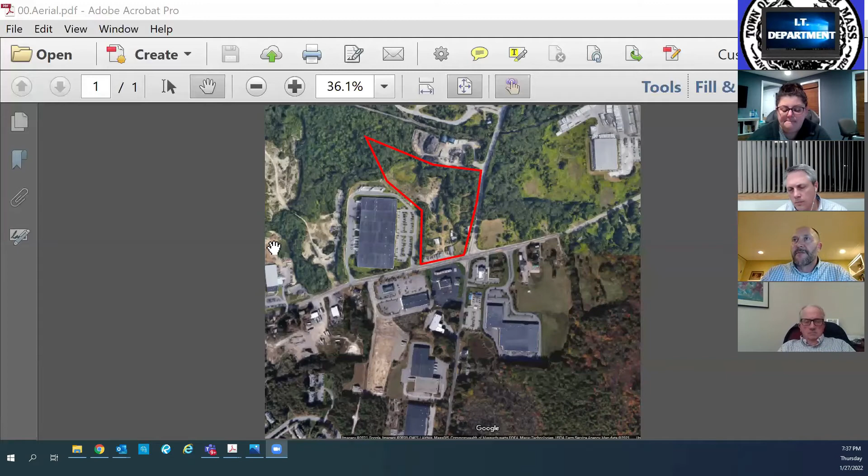And you can see the other uses nearby - we're abutting the Conroy warehouse there, an asphalt plant behind us, Gorelick Farms, and some other industrial uses. So with that, the proposed plan is a 124,000 square foot warehouse, as I mentioned. The project has been around for a little bit of time now, so we have worked very closely with the Zoning Board of Appeals, Mr. Kupfer, and staff as well, to really identify any goals and concerns and try to incorporate everything we've heard to date into the plan, which I think we have done, and I think it's a good project.

So we've got a Welcome to Bellingham sign right at the intersection. If you're stopped there, that is what you're looking at. Again, the landscaping behind it and in front of it, and you can kind of see the berm on the side of the building over here I was just referring to.

From an engineering standpoint, this site is about as straightforward as it gets compared to a lot of sites we see nowadays - we have nice sands on site, no ledge, and deep groundwater. Based on that, we're able to do two things: we were able to further drop the site, so it's actually about 6 feet lower than the intersection, further breaking up the view of the building, and we're able to balance the earthwork on site, so with cuts to fills everything balances and we don't have to bring in or ship off a lot of material.

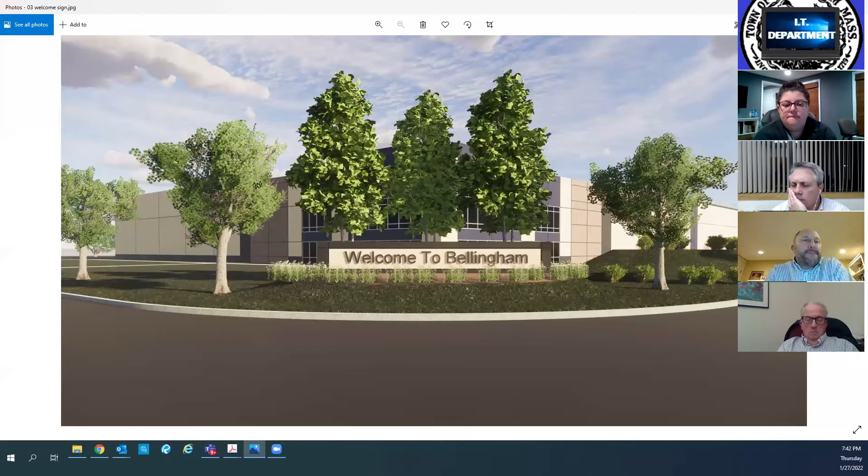From a drainage or utility standpoint, all utilities are present along the frontage and are available for reconnection, which is what's shown on the plans.

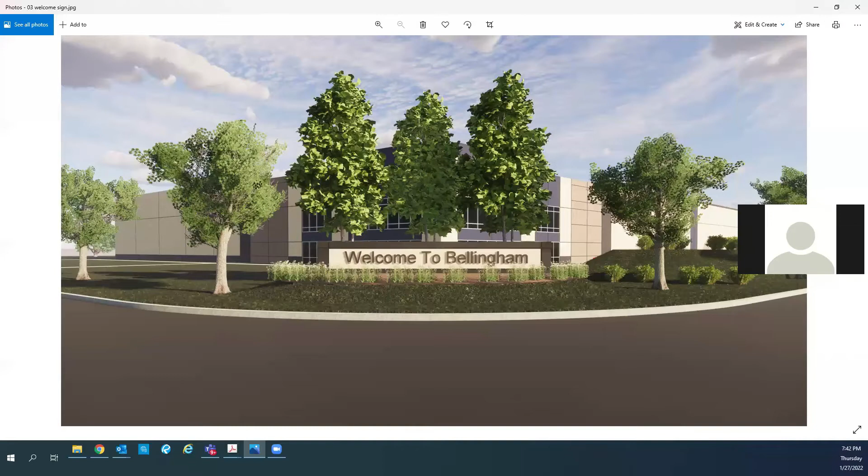We've made some significant improvements to drainage. When the abutting warehouse was constructed 15 or so years ago, a detention basin was built to serve this site - it was essentially oversized, intending the drainage from this site to go to it. Based on conversations with the Conservation Commission agent, we discussed providing treatment and infiltration on our site in accordance with today's standards, even though the site was designed to handle it. So we've done that - we've provided a stormwater system fully compliant with today's standards by way of recharge and treatment. Essentially every drop of water that hits this site will be treated and infiltrated into the ground, exceeding state and local standards.

As part of the application, we submitted information from our traffic consultant. As the board likes to see, this is a small warehouse, 124,000 square feet, so it's a low traffic generator. That said, we've also provided numbers as if it were a different type of warehouse, light industrial, and even a high sort facility, just so you could see those numbers. That's been provided to the board, and we expect your peer reviewer will review it.

What I will note, from a circulation standpoint, is that based on the location of the site, the majority of trucks exiting onto Maple Street are restricted from heading northbound on Maple Street. So we want them coming back towards Mechanic.

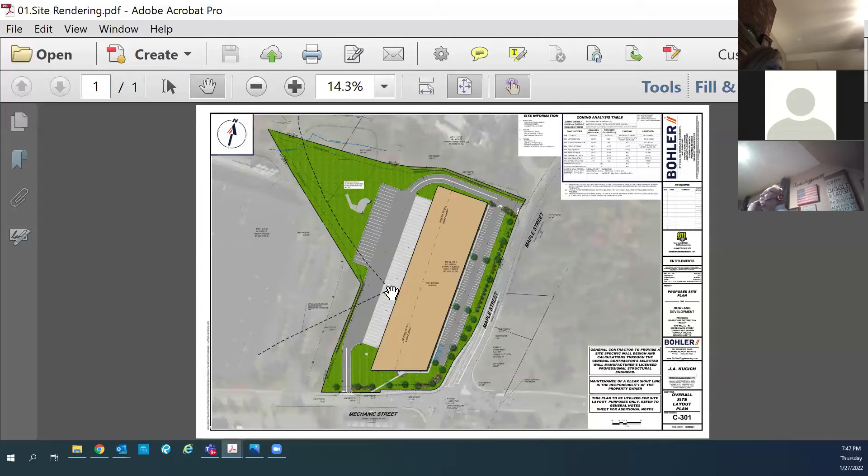The benefit of allowing that variance, which we have received—the variance has been issued and has become final—is that it enabled my client to develop this site with the truck loading in the back. If we had to keep the use in the industrial portion of the site, you could configure something, but it would not be a particularly attractive utilization of this property. And the feedback that we got from our preliminary discussions was that this design was much preferable.

What went along with that variance is, in the industrial zone, maximum height is 45 feet. In the business zone, it's 35 feet. So to have a building with a consistent height of 45 feet, we needed a variance for height. That went along with the use variance, and that was granted.

And then there were two other variances. One has to do with the driveway to Mechanic Street. Good engineering practice would locate it as far from the intersection with Maple Street as possible. But as we got closer to that edge of our property, you come to a second driveway on what was just referred to as the Conroy warehouse. The zoning bylaw wants at least 250 feet of separation between driveways. This is about 130, 135 feet. We needed a variance for that.

Our traffic consultant went through and is happy to review with you why, in these particular circumstances, the separation is not going to create any safety issues. And the way we will propose, for purposes of consideration, is some relining of Mechanic Street to allow for some center island opportunity and to direct the turning movements to make those driveways work very efficiently. So that variance was granted, and I believe there was a small variance about the parking layout.

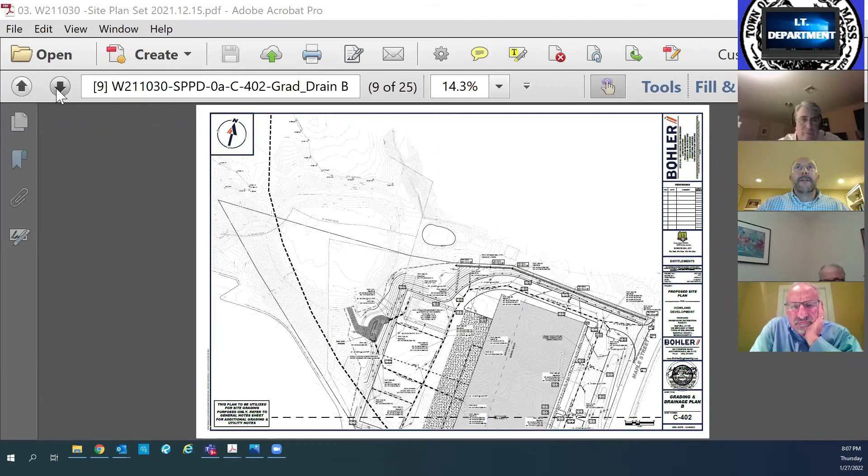Let's see, I'm going to share my screen again. Unfortunately the sheets are broken into two sheets, so you'll have to bear with me as I flip pages. You'll see on this is the back side here. You can see the berm coming up this way to our match line halfway through the building. And then when you flip the wrong way, apologies, you can see the berm continues up and starts to come back to grade right about here, give or take.

How high is that? It varies in height. At this point right here, it's a high point of about 8 feet, and then obviously it tapers down towards the edges. So right about there is about 8 feet.

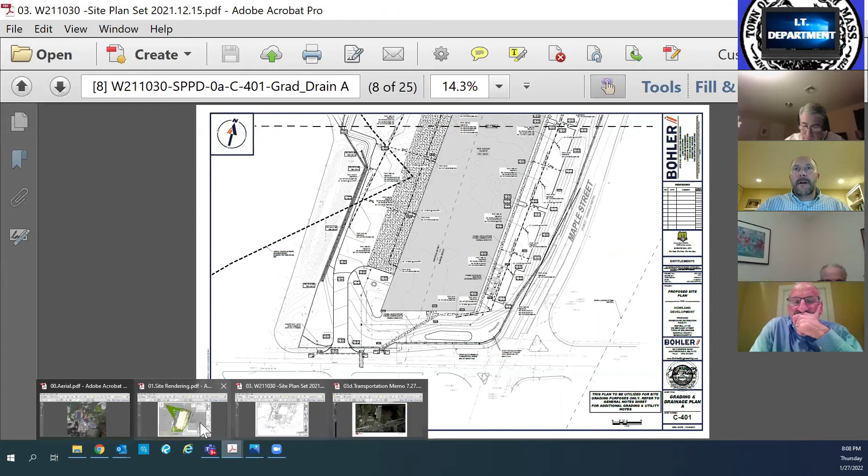Plantings on there? Absolutely, and you'll have future diagrams for that? We have current diagrams for that, but that was in the set that shows it. We can look at that later, sir. You got it. That's it from me.

Hey Bill, if any of the other board members don't have any comments or questions, I have a few. Certainly, I don't want to jump ahead of the line though. So go ahead. All right, perfect.

Rob, one thing I want to pick attention to, and you may pick up on this: it looks like they have storage for trucks back there. Two things for the applicant: they have all the trucks on site and not on Maple Street or Mechanic Street waiting to get in. And if you're storing trucks overnight, we need to address the concern of a spillage of any gasoline from those trucks. And with that, I'll turn it over to Rob.

Thanks, Bill. First off, thank you, John and Paul, for the presentation. That was really informative, so thank you very much. I guess I just want to echo some of the same comments made by Phil and Bill regarding the curb cuts. I agree that trucks going north on Maple Street, it's great if that can be restricted, because it's just not a good road for that kind of traffic.

I guess I just want to take a step back from traffic. I have a few more questions or comments. The next thing, regarding stormwater, I know you stated, John, that the existing basin you'll be utilizing after the underground infiltration system was designed for a development on this site. What exactly was the design? Did they spec out a specific size building, or how was that sized exactly?

That's a very good question. So long story short, to get into some of the history, the detention basin is that faint line right here. It's actually on this property and the abutting property. When this development came in, the plan was to develop a basin that handled flow from this site as well as that site. During the permitting process, to address your question, it essentially said you needed to plan for, I want to say it was 90% of the site needed to be impervious. So it was a very, very large number. We're well under the number it was designed for.

However, even on top of that, based on conversations with Ann, just how regulations change, they wanted us to treat and infiltrate the first flush on our site, which is what we've done. But if you actually head into the site and look back down the hill, it's a massive basin. It's huge. It looks very big from the aerial. So basically that recharge basin is for recharge volume and water quality volume, essentially.

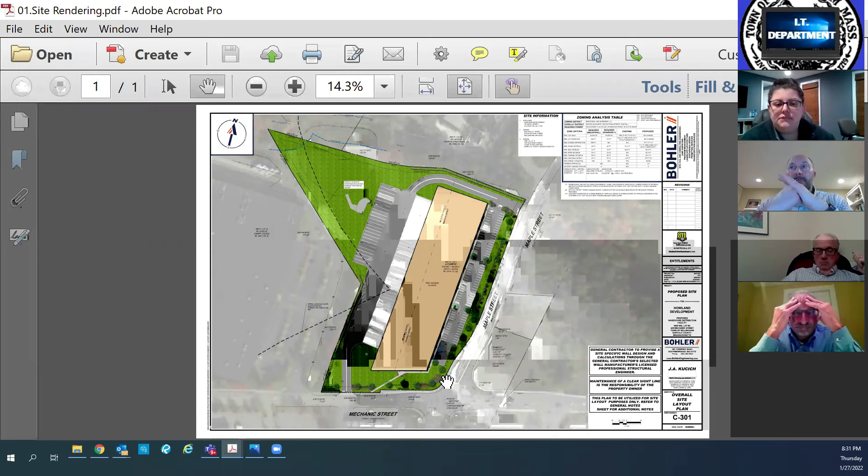Now that may be a lot of money, and then the project may not be worth it. Again, I'm asking the developers to think outside the box. I'm also asking the developers to think about the east side of Maple Street. I know that's Franklin, but who are the landowners in Franklin? Can you work with those landowners in Franklin? Can we as a town work with Franklin? We certainly work with them at the end of Stonehenge—there's a development at the end of Bellingham Road, that's Franklin. So I know we can work with them. So what can we do?

Can we take some land, or can the developer take some land in Franklin to widen that east side of Maple Street, making that left turn on Mechanic going toward 495 or going east simpler? Because that's a problem right now.

It's a problem today. Now if you just add more tractor trailers—and here's the rub with me, I understand you're building a spec building, you're going to attract a tenant. It's harder for you to attract a tenant if you have to tell them no to 24/7 and no to tractor trailers.

That limits your market, I get that, but we have a problem. The more tractor trailers—if you just added 15 or 20 times that, because it's 2 trips a day, you're just adding the volume. So I don't know what the answer is. I'm just throwing out some ideas from living on the street for 35 plus years.

I like the idea of the berm. I like the berm in front of Victory. I know some folks here don't like the berm. Well, they don't live across from Victory and they don't have the light shining in their bedrooms at night, but the berm blocks that. So I can look out my window and see some really nice trees instead of a big giant building. The berm helps out, at least for the residents on Maple Street. I like the berm. I hope the berm stays.

When it comes to landscaping, I don't want 3-inch caliper trees, I want 10-inch caliper trees. I want mature trees, so when you come into that Welcome to Bellingham sign, it looks like it's been there for a while, not so new. It becomes part of the community by having larger, bigger caliper trees. I know they're more expensive, but I think this would make it more attractive as a developer. These are just some initial thoughts I have.

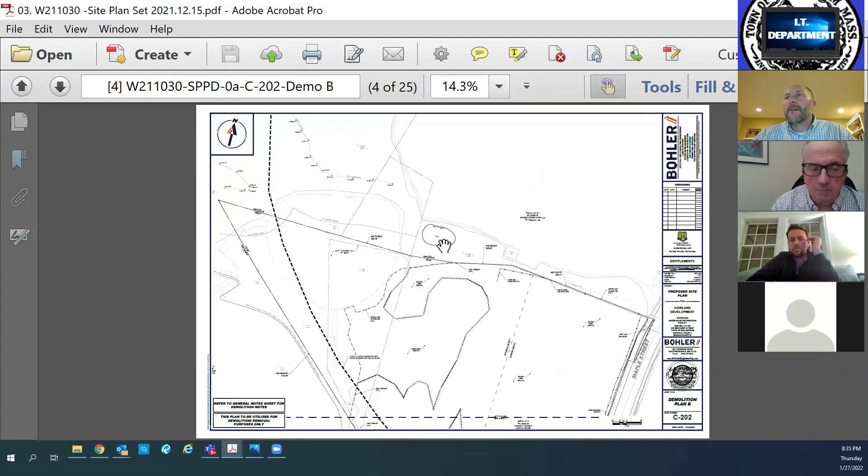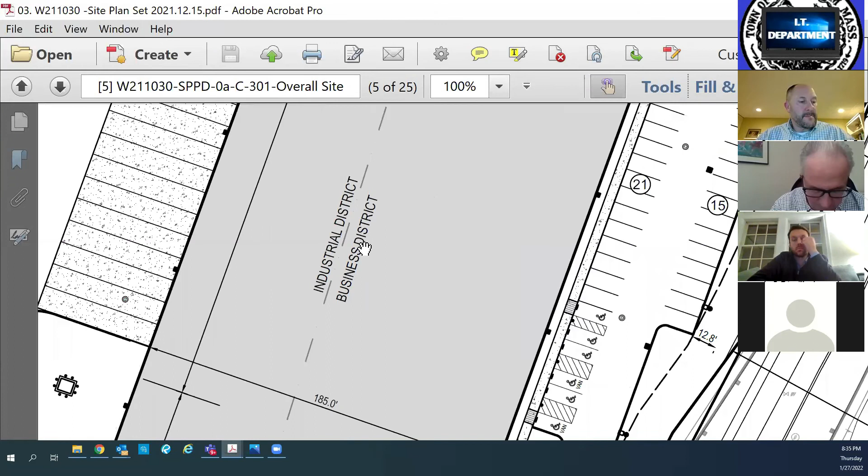And while that's being looked up, just to keep things moving along, a question for the planning board. When the warehouse just to the west on Mechanic Street, which has been completed and may be occupied at some point down the road, was approved, part of the conditions was the developer providing a traffic study through to the center of town, with lighting and so forth at Blackstone Street and up through the light they have yet to install. I thought it may have extended as well to the traffic at the Mechanic Street, Maple Street intersection. Has that money been utilized, given by the developer yet? Has the study happened? Because it sounds like it would be really beneficial to have had some of this traffic study done to impact going towards the center of town as well.

Mike, I think the best person to answer that would be Jim. Yeah Mike, the Route 140 corridor study has been completed and is posted on our website under the planning department's website. Did it include that intersection, Jim? It goes to the length on Mechanic Street, it doesn't run up Maple Street in either direction to that light. Okay, good, okay, thanks, I'll check that out.

And Mike, just to let you know, until a light is in place and approved by the state, the owner of that property is paying for a detail.

I remember that from the conditions. Okay, yeah, that's fine. And that was pretty substantial for us to get. Yeah, I remember that. I was shocked when I heard that they had agreed to that.

Minor point, there was, and may still be, right on the corner there, a town historic marker marking the fact that trolleys used to be there. Has any discussion been done by the Historic Association in town about relocating that if that site is developed? I mean, across the street is Franklin, so maybe we can't do that, but it has some historic value at some point since somebody put a town marker up there.

So I guess to your first question, the building size, I apologize, is 185 by 640. It varies a bit because of the chamfer, but that's roughly the length and width. 185 wide and 640 long. So in the long area here, it's 640, and 185 this way, so a little bit shorter in this direction.

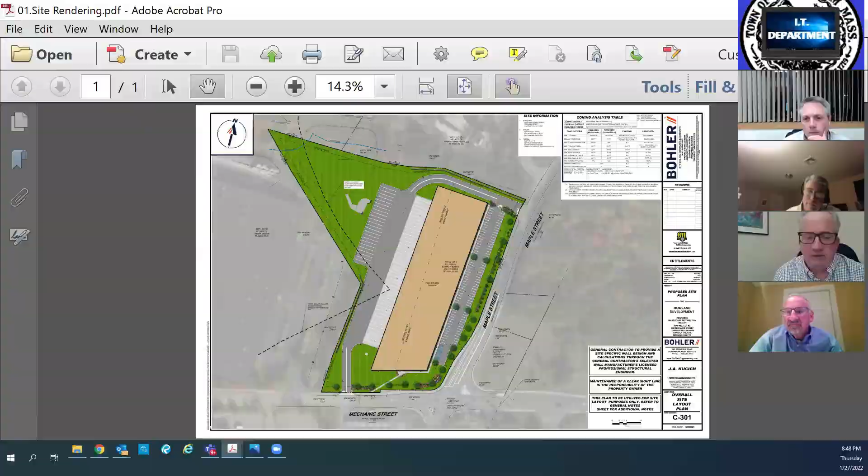And we all had a chance to review the minutes from our last meeting. Bill, if I could, there's just one edit that I saw, that in the minute section itself, referencing the minutes, I think it didn't reference... I think it was supposed to be December minutes, but I think it says the date of the hearing in which we approved the minutes, but not the actual date of the minutes. I can check that for you, Brian. Okay, that was it.

We're looking at the January 13th minutes, correct? Yeah. Oh, okay. What was that, Bill? I think it said January 13th on a motion made by Brian Salisbury, seconded to approve the minutes of January 13th with revisions. Yeah, it should be like December 9th or December. December, yes, yes, gotcha, thank you.

Nice catch. One thing also with those minutes, with present at the meeting, I was not present at the meeting. Well, I wasn't sure about that because I wasn't sure if you jumped on after. I didn't. Okay, no problem. Sometimes it's hard to tell. Rob, fix that. No, I get it. I can make that change. I have that effect on people, they just ignore me. I get it. That's why I talk so much tonight.